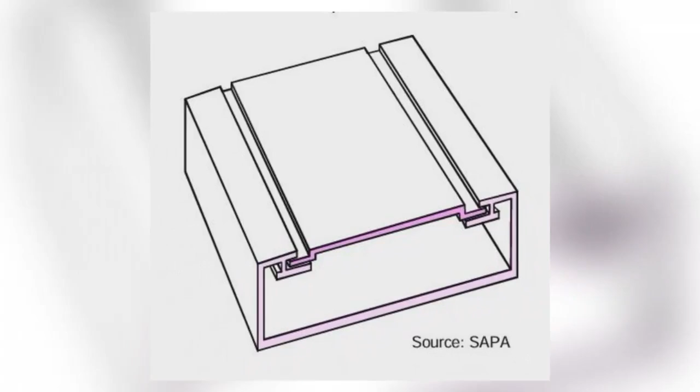A typical method involves creating a groove and tongue to connect two profiles longitudinally, which enhances strength and stability. These profiles can be securely locked using methods like lock screws, plastic deformation with a hammer blow, or screws at the ends, ensuring a rigid connection without traditional bolts.

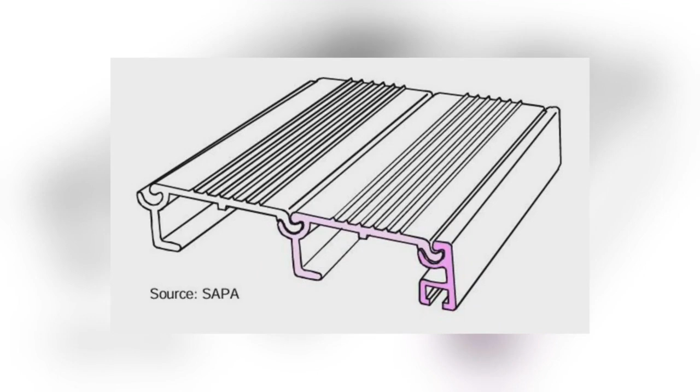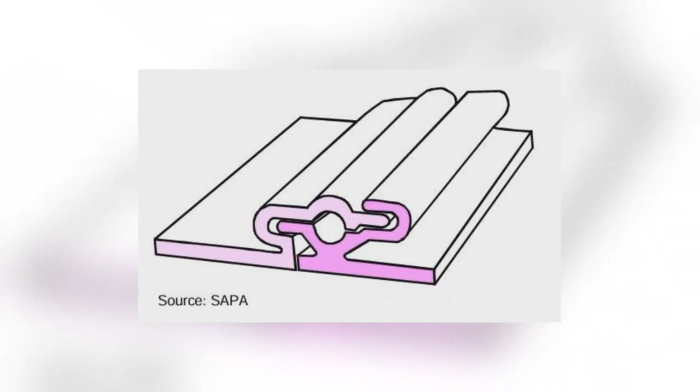This figure shows a brilliant design where connection grooves can also be used for washers or bolt heads. In this case, the two profiles constitute a socket which is used for locking the parts and for mounting an end fitting. The figure shows that joining is also possible by using a separate, smaller profile that is cut into short lengths and used for locking.

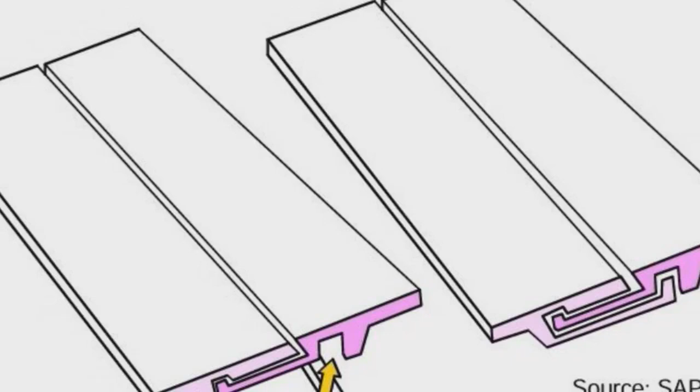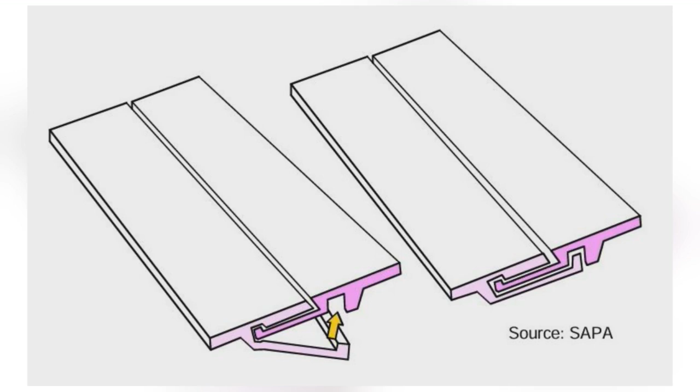This connecting method takes advantage of the workability of aluminium. Two profiles are locked together by pressing intermittently or along the entire length. This gives a permanent connection. This figure shows a connection when two aluminium profiles are rolled together. Several decorative elements are connected together with separate parts.

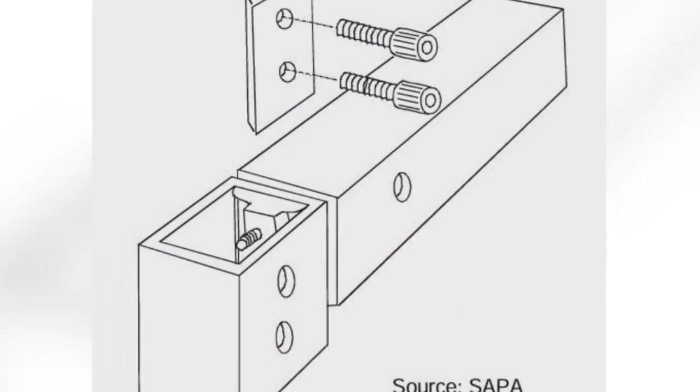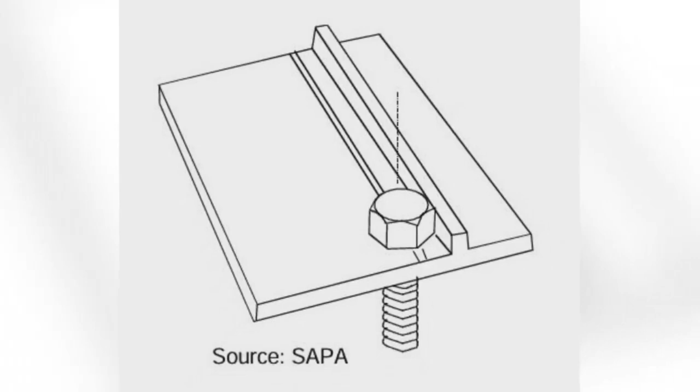Here it is shown how material is saved by using a separate profile, cut into smaller lengths, as reinforcement for screws. The elevation on the profile is placed so that the bolt is fixed in its position, which simplifies assembly. Assembly is simplified if the screw is fastened to the part in the manufacturing stage.

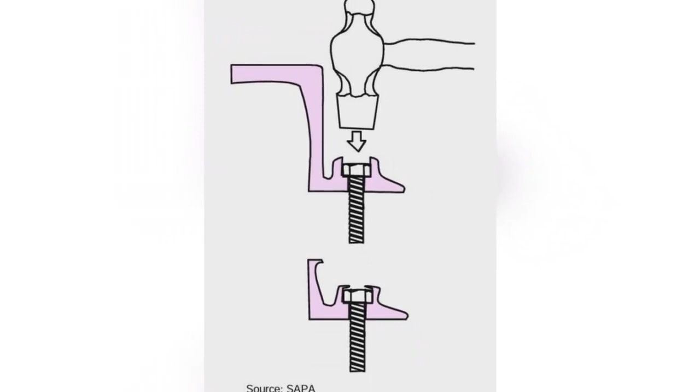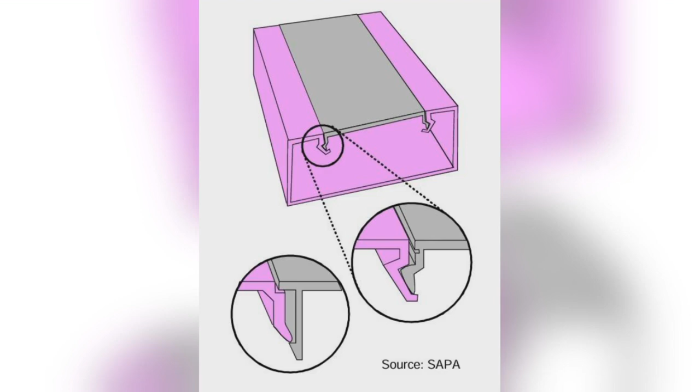Next, we shift focus to snap joints. Characterized by their elasticity and design simplicity, snap joints provide fast assembly without the need for attachments, drastically reducing manufacturing time. These joints are designed based on their intended functionality.

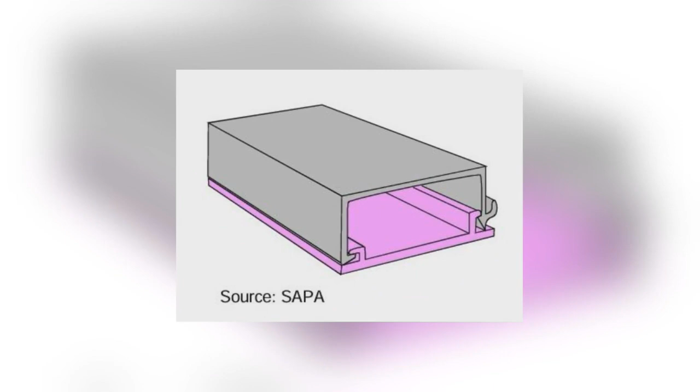For instance, some snap joints allow for disassembly with a screwdriver, while others ensure a permanent bond, suitable for applications such as truck panels. If the connection is to be opened and closed often, the elastic profile should be replaced by another material such as a plastic clip with regards to fatigue.

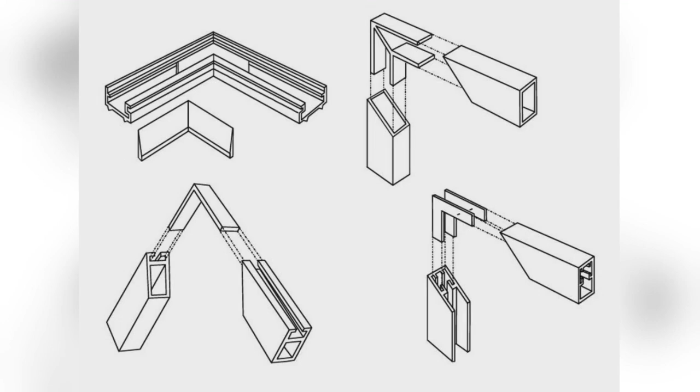And finally, about corner blocks. Corner blocks are used in corner joints that demand strength and stiffness. The block itself, which can be cast, or as in most cases a profile cut into short lengths, is fastened by pressing or by screws into both profiles. In frames and other light structures, the corner blocks consist of a pressed steel angle.

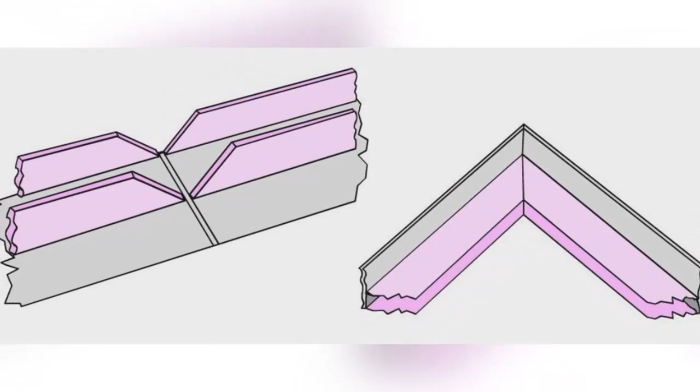The Sapa joint is an example of a corner joint. The width of the joint profile can be cut to fit a hollow section regardless of its width. This figure shows miter joints. Miter joints are a common method of producing corners in frames where the same profile is used in 3 or 4 sides. It is possible to bend the profile once. Repeated bending will cause the material to crack.